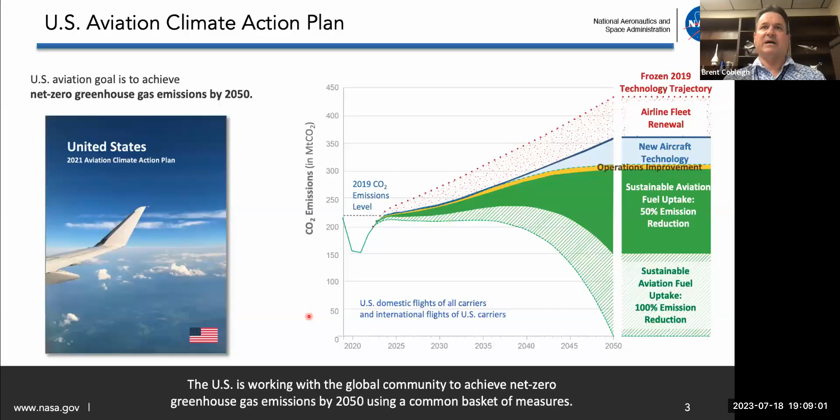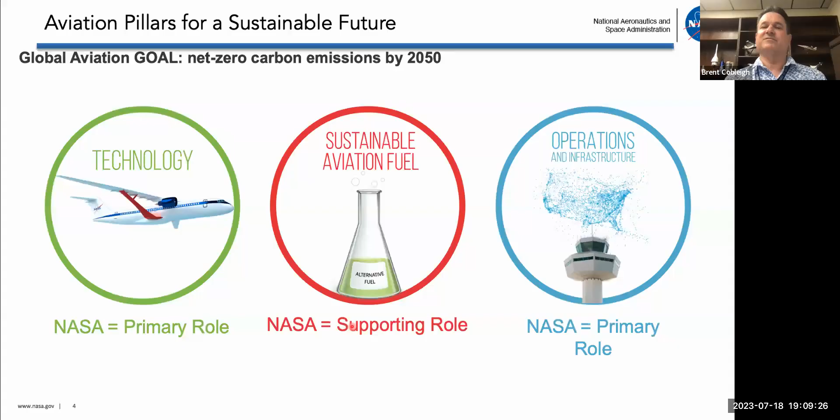So NASA's working both on the technology side as a primary area, and on the operation side, which had a little wedge there. The alternative fuel side is really mostly driven by other government agencies and, of course, industry. The Department of Energy, Commerce, and Agriculture all have roles here. We have a supporting role helping them with things like measuring exhausts and seeing how these alternative fuels—what's coming out of the exhaust, things like that. But our primary role is over here.

We've created this kind of pseudo-organization called the Sustainable Flight National Partnership. It's really a loose collection of all the things we're doing that fall into the commercial aviation sustainability window. It's a collection of projects—there's a lead for this with some system analysis people, but in general, this is kind of a loose collection of projects that are tied together, trying to bring a lot of different options to bear on the aviation world.

And so they involve some things, and if we have any time at the end, we could potentially talk about some of these other ones. But there's a lot of work focused on gas turbine engines, making the core smaller, being able to pull more power off them to run electric motors and improve efficiency. There's some electric airplane propulsion activities, both in the design field and some flight projects in this electrified powertrain flight demo. There are actually two flight demos in progress right now, working towards flight.

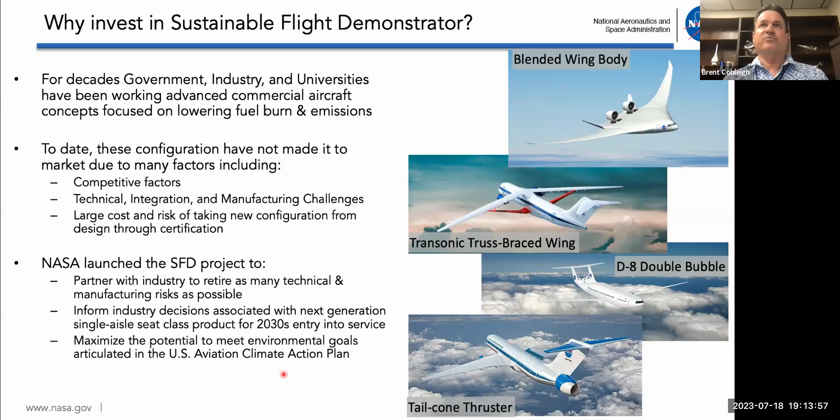When whoever launches the first sort of more efficient airplane, the others are going to have to keep up with them. And then to maximize the potential, we're going to meet the U.S. Aviation Climate Action Plan goals. So that's sort of the driver behind SFD and why we launched it.

I won't spend too much time on how we got and selected the truss-braced wing. It was an open competition. There were half a dozen or so proposers that looked at a lot of different things. We were looking at something that could make it to market by 2030, so we weren't looking at the most advanced potential technology that's out there. Our focus was, hey, we need to get something out there.

We need to improve what is there and continue to work the long range on hydrogen configurations and other potential configurations for commercial application, but we need to get something in there in the next generation. Every generation lasts for several decades, right? You've got to recoup your costs, and so there's not going to be an airplane released in 2030 and another one in 2035. It's going to be a long time later. So we want to try to influence that as best we can.

So these are the criteria that we came up with for the proposal evaluations. So we weren't just looking at the demonstrator.

So the demonstrator was one piece, and that's normally where NASA would be focused. But we said, no, we want to know what your vision is for your future product. We want to know how you're going to get there. So we're less concerned right now on the demonstrator. Let's focus on what's your vision?

What does this airplane do? How efficient is it? What kind of impact is it going to make? How is it going to hit the market? Is it compatible with the aviation system? What's your plan to commercialize?

So that was the first set of things we evaluated in the proposals that they wrote. And then, how is that demonstrator aircraft going to help you get there? So we don't just want you to go play with technologies. We want you to tell us the technology gaps you have, and then put as many of those on the demonstrator as you can. So what are those technology development plans?

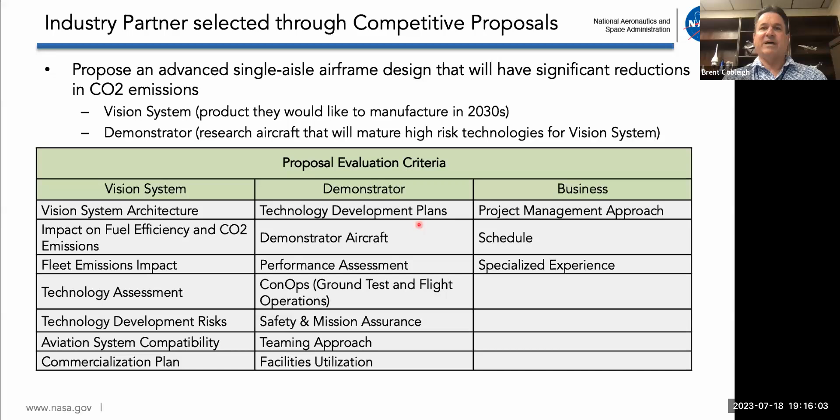So those were the evaluation criteria that we used. In the end, Boeing was selected for the truss-braced wing. NASA is providing $425 million in direct payments, and Boeing is putting in over $700 million. That's the estimate now. So we were asking for the proposers to put in 50% if they were able, or more, and Boeing truly stepped up here.

The 425, by the way, was the limit that we had. We said that they could propose, so maybe they would have asked for more if they could have. And in addition to the 425, NASA is going to be moderately heavily involved in helping with this project, and I'm going to go into some of those in a minute here. But in terms of technical labor, like engineering support, analyses, and also some of our facilities for some of the testing that we're going to do.

One of the most unique things about this approach that we're using is that we're using what's called a Funded Space Act agreement. It's a very unusual type of acquisition. It's not a contract, it's a legal agreement. We've never really used one in aeronautics before. The space side has used them. And it's really where you're trying to encourage something in industry that is helping either industry or helping the public or some other person. And NASA doesn't have a significant need for it.

And the intention is you're trying to create a product or something that really helps things other than NASA. In other words, we don't need this airplane to do our work long term, but we know it will have a benefit for the nation, for the public. And so this Funded Space Act basically allows us to cost share like this.

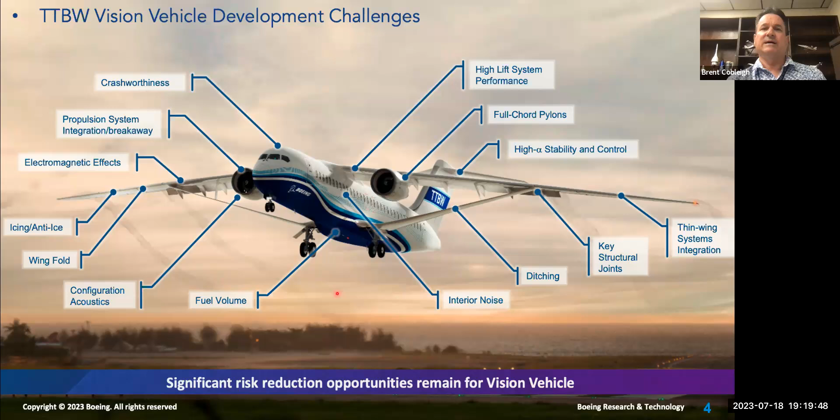These are some of the development challenges that exist. So you have this long aspect ratio, high aspect ratio wing, which means your chord is much shorter, which means your wing is much thinner. So it's a very thin wing supported by a truss. So you have many, many structural challenges in trying to design that, to optimize it, to get the best performance you can get. So then how do you integrate a high lift system into that?

You've got an engine now that needs to be attached to a wing that has a very short wing chord compared to what you would normally see. It's basically using almost the whole chord as a structural attachment. You have some high alpha stability and control challenges with the T-tail, as we've seen in the past. Just getting everything into that thin wing is a challenge. So you've got actuators, fuel, you've got the structure itself. In our case, we've got to also add instrumentation. So just getting all of that fit into the wing is a huge challenge.

And then you've got some really unique structural joints where the truss meets the wing, where the truss meets the body and interfaces in an area that typically would be near the landing gear. You've also got, how do you design this thing for safety in terms of a ditching or some other crash loads, things like that. Also damage, in my opinion, from ground operations, this truss. You've got interior noise challenges, because now you've got engines that are not on a typical single aisle low wing airplane. You've got the propulsion system closer to the fuselage.

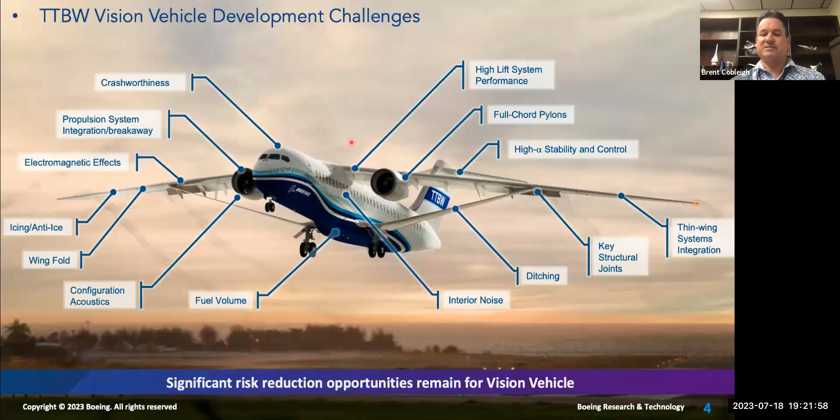And then, how do you fit icing, de-icing systems in it? And then you've got EMI issues with having everything crammed into a small space inside the wing. And the rest of it's kind of crashworthiness. So these are just a subset of the things that you have to worry about and consider and reduce risk on. So over the years, like I said, from 2008, we've been working in partnerships.

In some of the early phases, we were really looking at low TRL, just looking at various aspects of this configuration, trying to solve some of the obvious problems. How do you design the structure? How do you get the benefits? How do you deal with channel flow through this sharp edge here? You might get local supersonic flow, get a lot of drag. So you've got to solve a lot of challenges there. And that was done during the early years.

And through a number of wind tunnel tests, lots of CFD, a lot of other analyses that I don't have the data to show you guys, as we moved up, there was a strong desire to push the airplane from this kind of Mach 0.745 up to where single aisles are flying today. There are a lot of marketable reasons and air traffic reasons for doing that. And that was always a challenge. How do you get this configuration with these channel flows and so forth up to higher speed? A lot of work was done there.

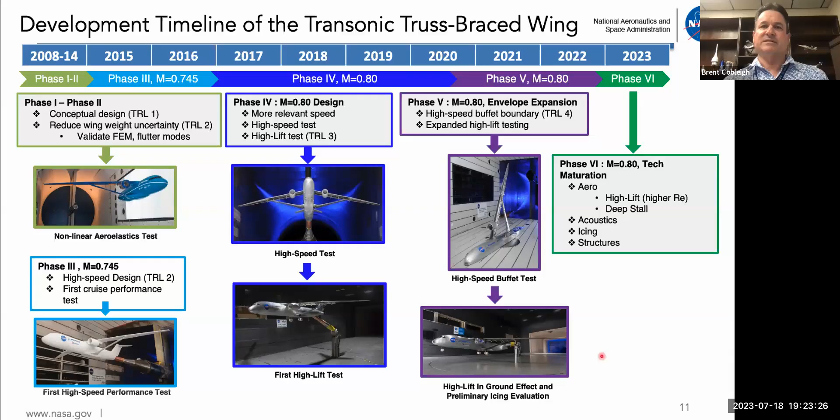It was very successful. So the configuration baseline is right about Mach 0.8, or 0.79, right in there. So a lot of work was done there. And then they were looking at off-nominal things like buffet, high lift, acoustics, icing, structures, a little bit more of that in some subsequent slides. But here's some high lift, ground effect testing and some icing testing that was done as well over the years.

So there's a lot of different ways to analyze a truss-braced wing. You typically hear people for a moderately optimized configuration saying that the benefit for sort of a long range of the airplane is, I don't know what the low end is, but you hear like 10 or 11% at the high end. So this is NASA work here, working with Boeing. I think for this configuration, which is in our current configuration, they had it about 9% or a little less for shorter missions.

And there's a lot of other things obviously you can do. So this is for a high aspect ratio wing that's 19.5 relative to like 13 today. So very significant wingspan compared to the airplanes that are out there today. And then this project, I don't have all the data, looked at a lot of, what if you make the wing sort of natural or hybrid laminar flow, adding riblets, what kind of advanced structures can you do to get the weight down? How do you design these joints for lightweight and strength as well? What kind of advanced propulsion systems can you integrate? And then how do you deal with the air traffic management with this configuration?

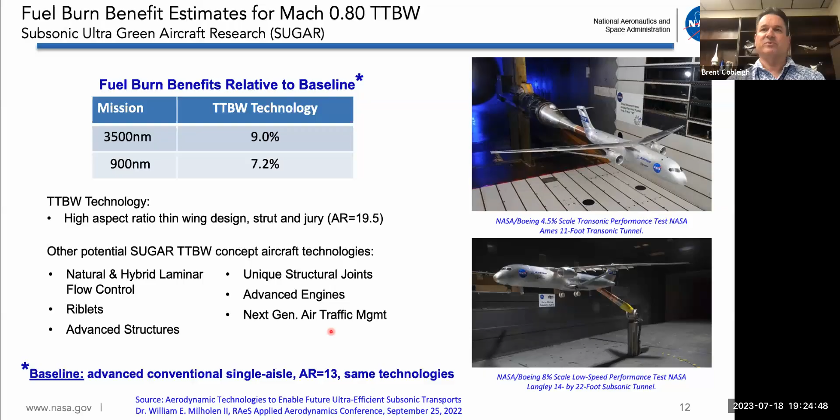So there's a little bit more later on some of these topics, but the aerodynamics is one piece, and then in a minute I'll talk a little bit about propulsion as well, how that might integrate. So I think some of this I already mentioned. Here's some of the things that there was a lot of interest in from NASA and from Boeing, looking at stall, buffet, icing, high lift. Since all of the performance and design challenges were solved, then you kind of got to look at a lot of these off-nominal situations.

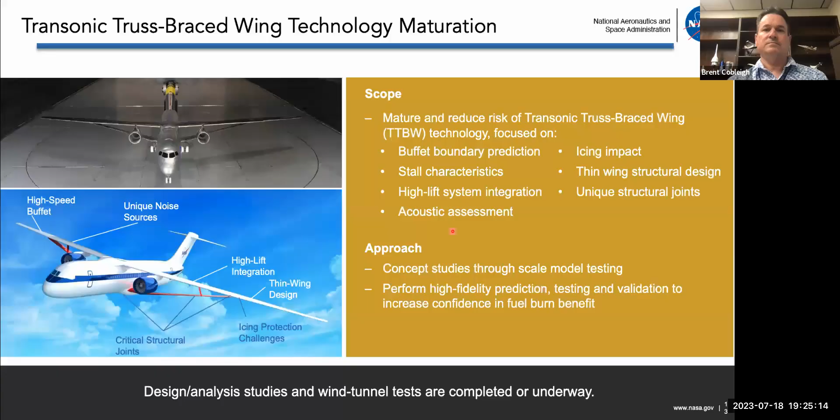Here's a couple other things that were done. So we're talking about high-speed buffet testing, really looking at where do you see that. You can see these half models that were tested in the Ames 11-foot, and that's really to get the size of the vehicle up and get the Reynolds number up in the wind tunnel. One of the challenges with having something with this high aspect ratio is the wings are so long; to avoid wall effects in the wind tunnel, you end up having to make the model smaller, which means Reynolds numbers are smaller. So one way to gain some of that back is to do some of your testing with a half model like this.

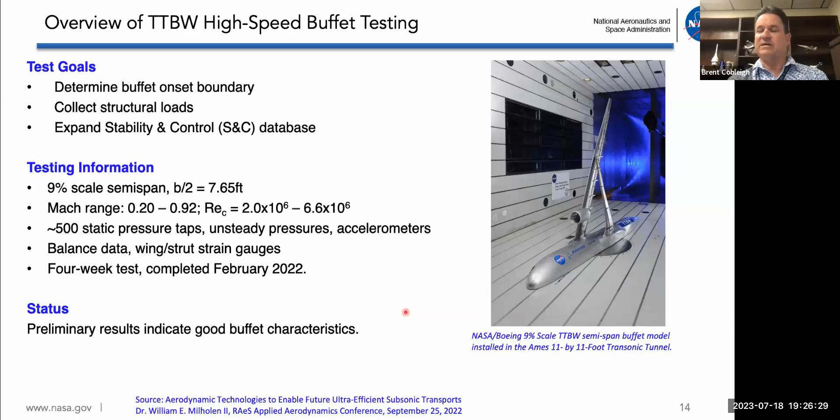And we've got some coming up with our projects. The configuration that's being developed for Sustainable Flight Demonstrator is going to have several wind tunnel tests in the same Ames 11-foot, including a full aircraft model and then a half model, just like this one is. So they looked a lot at stability and control. You can see a lot of the data on how they ran the tests back in 2022. So the bottom line is there was a lot of concern about buffet, but it turned out that the characteristics were pretty benign. They weren't concerning, at least for the data that they've analyzed so far.

And then on the low speed side, how do you integrate a high lift system on something that has such high aspect ratio? You've got a very long leading edge and trailing edge. So integrating all of the control systems into those is quite challenging, especially given that it's a very thin wing. So they looked at a couple of wind tunnel tests looking at the performance of various high lift systems. Also looked at ground effects tests. I think this is the 14 by 22 wind tunnel at Langley, where they typically do those.

And then they looked at some preliminary ice shapes that came out of some CFD results. And you can see over 500 static pressure taps on the model, so it was a pretty detailed model. And they did see that the high lift system was meeting performance goals, and the ground effect trends were as expected. And they've got some data on what the icing effects were, at least for some of the shapes. We do expect that they will be doing some additional icing tests in the future on this configuration if it moves forward.

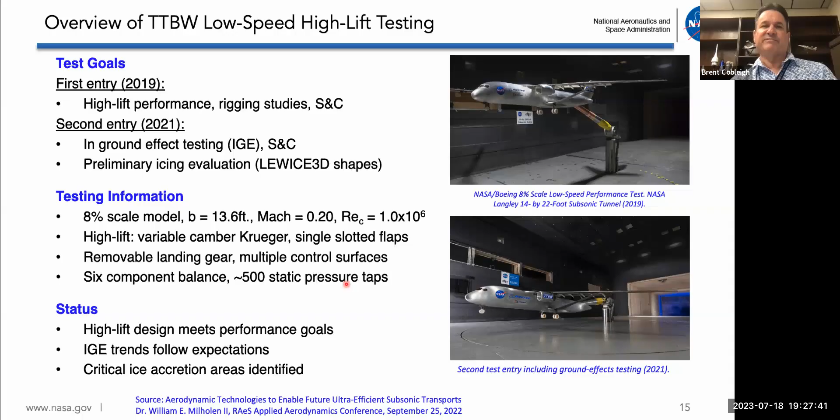So I do want to flip back now a little bit to the X-66. So this is our project coming back to today. So I'm going to give you a little bit more detail now. I just wanted to sort of stop there and back up and give you a little history of how we got to where we are. This proposal that Boeing put together wasn't necessarily out of thin air. There was a lot of really good work that went into it beforehand. So they brought in a pretty strong proposal.

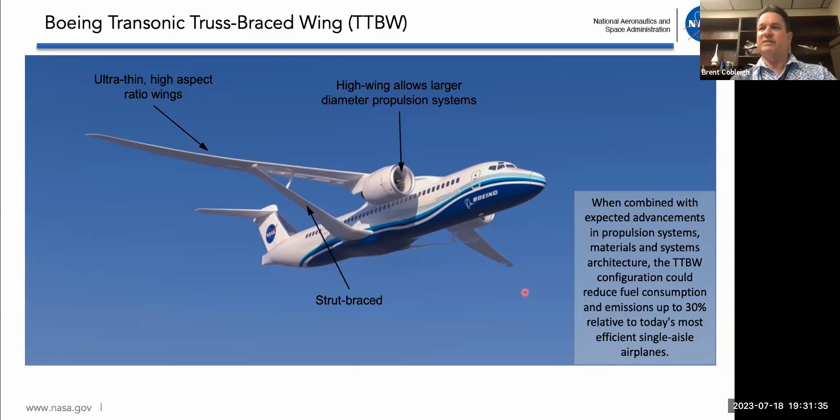And so early on, Boeing has targeted a number of key learnings. There's a lot more detail to this that I can't show, but this gives you a flavor of some of the things they really want to learn out of this demonstrator, in addition to just the overall design structure. It's the thin wing design and integration, high lift systems, like I mentioned. How do you integrate a fuel system into this thin wing and other places? How do you deal with the aeroelasticity of this very long structure? It ends up being fairly stiff in here, but as the wingtip goes out in a very thin wing, you're going to have some flexibility there, obviously.

You want to validate some of our design tools in every area, aeroelastic, structures and so forth. Obviously, a lot of performance measurements we want to take. We want to do a lot of long runs over, say, the ocean, so we can get some nice, clean data to measure the overall performance and see if it matched predictions. Similarly, some performance for stability and control and the typical flight test things. I mentioned certification, crashworthiness. How do you design and deal with that? That's not necessarily a flight test goal, but it is certainly part of the design effort that they will learn lessons from.

For the propulsion system, they obviously want to go to sustainable aviation fuel compatibility. We probably will fly at least some of the flights with sustainable aviation fuel, but there are a few challenges there with seals and different things depending on how the fuels develop. So they want to make sure it's compatible.

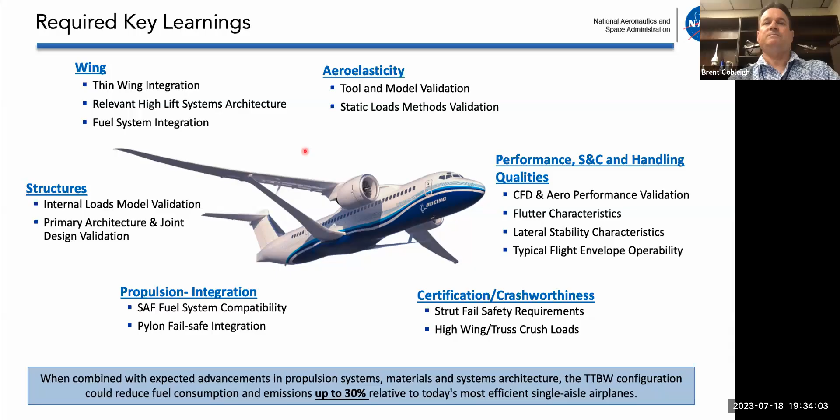So let's talk a little bit about how we're going to build the demonstrator. I mentioned that they're starting with an MD-90. They've actually acquired two airplanes from Delta Airlines that were recently overhauled before they were retired. From my understanding, there are no MD-90s flying left in the world, and so they've acquired two airplanes.

They've acquired a ridiculous amount of spares—like 38 truckloads of spares from Delta, because Delta didn't need their spare parts anymore. And what's nice about this—there was a whole trade study around what airplanes we should modify or build from scratch. Many airplanes were looked at, and there are a lot of reasons why this makes sense.

Some of it I'll show you here, but part of it is: Boeing bought McDonnell Douglas, so they own all the IP rights. They have all the design information. They have a lot of employees that helped build this airplane, including several people on our project, including the chief engineer, for example. So there's a lot of benefit. It also already has the T-tail.

So the intent is: what do we not have to do on this project? We only really care about the truss-braced wing. So if we don't have to change the tail or the cockpit, let's not. That's the intent. So how's it going to change?

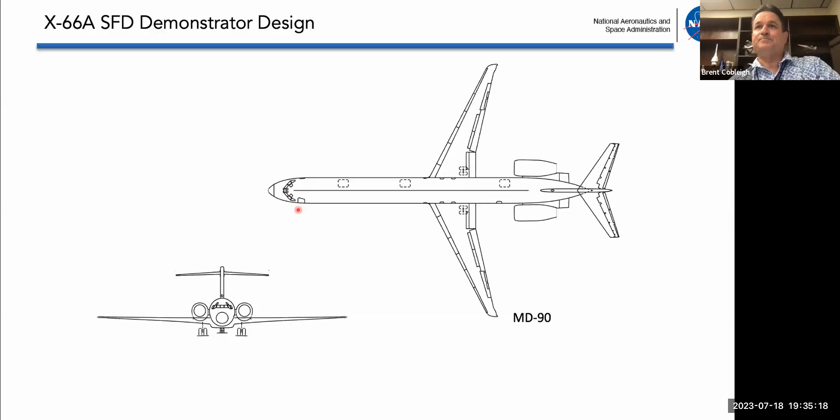Step one is we've got to get rid of the wings, and the engines are no longer going to be on the fuselage—they're going to be under the wings. So those have to go away. And it turns out, to get the configuration they're really looking for, you need to shorten this thing too. The MD-90 is an extremely stretched airplane, so they're going to take 19 frames out.

This airplane, being an older design, makes that actually less difficult to do than you might expect. I've seen it's really drilling out lots of rivets and taking things apart and putting them back together. It's of course extremely challenging and precise work, but nevertheless, they don't have to take a saw out and cut the airplane open—there are ways to do this.

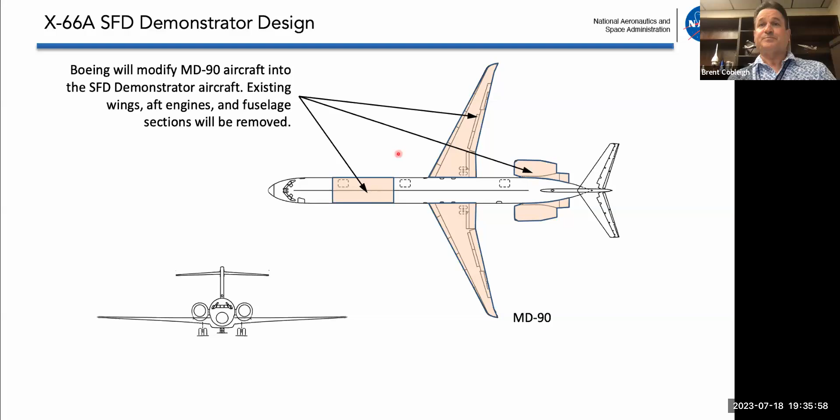So that's going to go away, and then this is what the ultimate airplane is going to look like—it's going to be replaced. You can see the engines aren't there anymore; they're up on the wing now. We have a much higher... I mean, for the same fuselage diameter, you're ending up with extremely long wings relative to that.

And this picture really shows off where the truss comes in, right? The truss is kind of perpendicular to the fuselage, comes into the area where the landing gear were, and there's some offset here, which you can kind of figure out on your own how that helps aerodynamically.

So that's basically, I mean, obviously I'm super simplifying things, but nevertheless, that's how we're going to transform this MD-90 into the X-66. The engines will be a modern turbofan engine. We're not developing a new propulsion system, but we'll be able to have something that's comparable to the state of the art.

And then, of course, you can always do trade studies beyond that to look at other propulsion options. I did mention earlier that Boeing will retain ownership of this airplane. So at the conclusion of our flight test, which is intended to be about a year, and we're targeting like 2028, 2029, they can use it for other things. Obviously, they can integrate other technologies, use it as a demonstrator for other things.

We will be doing a lot of instrumentation on this. This is all going to be built here in Palmdale at Boeing's facility, which is only about 30 or 40 miles from Edwards Air Force Base, where I work at NASA Armstrong. So once the airplane is built, they will fly it. On the first flight, the intention is to bring it here to NASA Armstrong and then do all the flight tests from here, which provides them lots of restricted airspace and access to the coastal areas where there's nice clean airflow for performance testing.

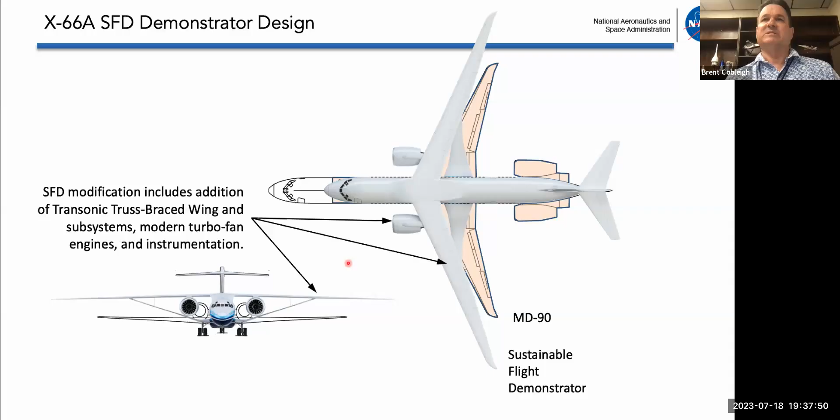So what is NASA doing here? I've been talking mostly about what Boeing's doing, but NASA does have some significant roles here. We are going to help them with wind tunnel testing, which I did talk about. We will have one of the simulations that will be doing all kinds of work, some of it preparing for flight, emergency procedures, training pilots. But my guess is they'll be doing design analysis work and other things as well.

Structural testing, we're going to test the actual truss in our loads lab, and we will send teams over to help Boeing with the structural test over the entire wing over in the facility in Palmdale, which is 40 minutes away or so driving. So we'll be helping with that. We're going to do all the flight tests here, so control rooms, hangar, radars, data management, all of that, chase aircraft. That'll all be here at Armstrong. And then we have acoustic arrays that we'll bring out for some of the flight tests.

And then another big piece of that is we're actually going to have engineers working, or we already do have engineers working on their integrated product team. So this is where we're bringing in structure experts or discipline experts to help them. And we might have some unique knowledge in some areas, and sometimes it'll just be being another person to help on the team, right? But we'll be outnumbered by 5 or more to 1. But I think it's valuable that we can bring some of our lessons learned to help with the overall activity. So it is a joint partnership, but led by the partner, as I said.

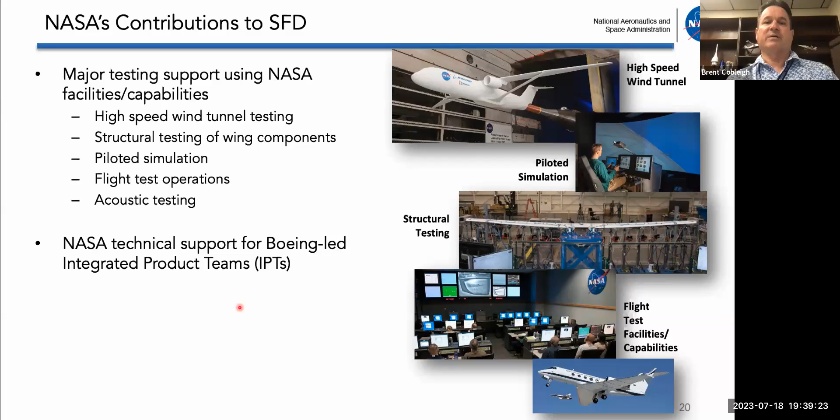The conceptual design review, which is at a pretty high level, the requirements to get through it are pretty high. They're sort of at the commercial level of a conceptual design review. That's going to be out in September, and then the requirements review out in December. We slipped it a little bit to raise the bar on what we wanted to accomplish in that review, so that's why they're out there now.

The MD-90 is actually going to be flying very soon here, like next month. It's in a storage facility. They've gotten it through all the maintenance, and they're going to be moving it down here to Palmdale, likely next month. So that'll be actually ahead of schedule.

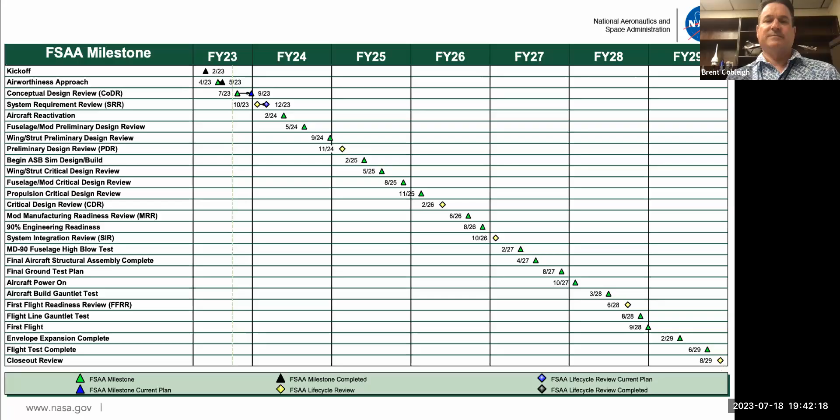Okay. That was terrific, thank you. I like to think I have a good handle on different aspects of design, but there were so many things I hadn't even considered that you covered here. Two questions, well, several actually.

One is, is the total value of NASA's labor and facility contributions fixed or variable under the FSAA? It's sort of variable. The content of the testing has been fixed ahead of time, so we know what we've agreed to do. If it costs us a little bit more to do it than we expected, we will cover that. And then we've kind of scaled the amount of workforce that we've offered up. So during the life cycle, there's a dollar figure associated with how much money we can use. And if Boeing comes back and says, hey, we'd really like some help in this area and we don't need as much help in this area, we can make those adjustments. So there's not a lot of cost risk until you get to the end. If for some reason the program slips a year, we will have some risk that we'll have to support our own workforce for an extra year, but we are trying to budget for things like that.

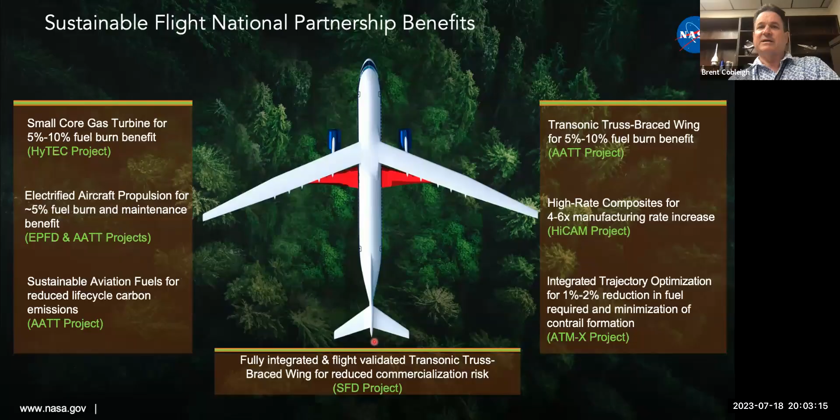Okay, it's just like 3 or 4 charts, but I mentioned these other projects in addition to the one we talked through this briefing. I'm not super familiar with these, by the way, but they all have a slide like this that gives you a little bit about what it is. There's a whole project team focused on this, and most of these are integrated with some industry partner, sometimes multiple partners. This is looking at compressing the core, making a smaller core that's more efficient, and also able to pull like 20% power extraction, to help hybridize an airplane where you have one propulsion system, and then the other propulsion system, if there is one, is powered by an electric system. It just provides some integrated benefits, just like we do with hybrid cars.

So that's one project, and it looks like they've made contract awards in 2021. Phase 1 was some stuff that they did in 2021, some studies, and then they put out the proposals, and they've received those in May. I don't remember if I've heard that they were awarded, but they probably have, or probably getting close to award on those if they haven't.

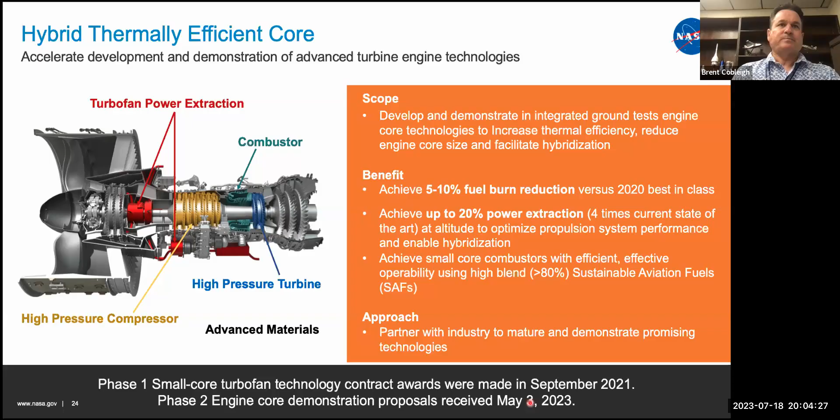And then the next one was looking at electrified aircraft. This is not the flight program I was mentioning earlier. This is just looking at all the issues mostly through ground test and advanced development. There's a lot of smaller contracts looking at the various elements within an electrified system: inverters and power conversions, and battery systems, and if needed, generators, making them more efficient, dealing with heat and heat exchanges across the system, how to get the weight down, and getting reliability up obviously is key.

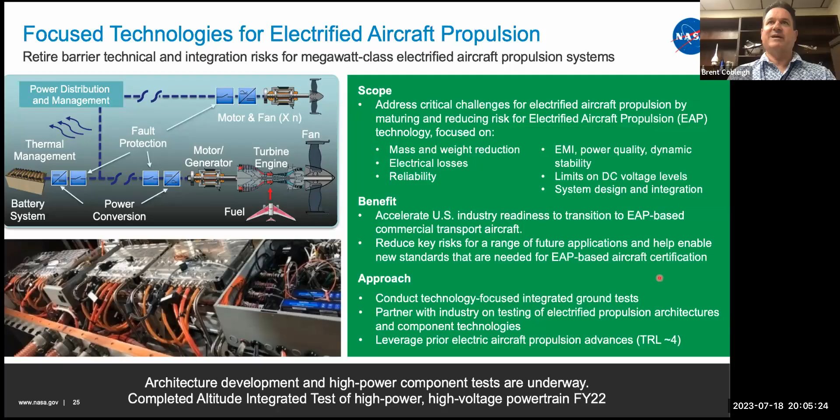So there's a number of investments here. These are sort of lots of individual investments across the whole portfolio, and I definitely don't have the details on all of those, but it's probably a lot of that can be found online. So the EAP project, you can go look up.

And then I mentioned EPFD. So magniX is the other company that's modifying one of the propulsion systems. Or maybe it's two on one side, but they, and then GE on the other ones. They're putting a single electric propulsion system and looking at the integration.

So these are all about the learning too. It's not just about, hey, do it and fly it. It's about what does it take to do it? How does it affect the other systems? How difficult are things like EMI, which is always an issue, especially when you're talking high power. How do you design things for high altitude and not get arcing? And the thing about taking things to flight is it forces you to think through all the issues.

If you just do a ground test, you can take shortcuts, and even if you don't think you are, I promise you are. Because as soon as you say we're going to fly this eventually, you're wearing your airworthiness hat all the time, going, how are we going to get this through certification? Is it really going to pass altitude? Is it really going to pass all these ground tests? Can it survive? We have a pilot's life on the line now. It changes the whole dynamic. And so having an integrated flight program really is the graduation exercise, and is really the learning tool these companies need to take it to the next step.

I have a question on that one. If you just want to flip, yeah, there you go. You say baseline unmodified flight testing of the GE Saab 340 was conducted.

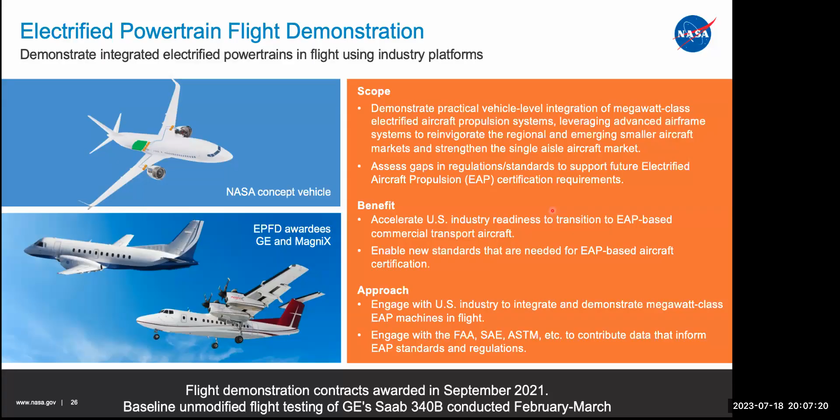Okay, I'm just curious then. Yeah, with the same kind of instrumentation system, so you have a real apples to apples comparison. If you're comparing against what the manufacturer says is the performance, you never know if that's really apples to apples. So we use our own instrumentation system, the exact same flight points, same flight, same pilots, everything. Now you've got a really apples to apples comparison, and you can take that delta really well.

And also make sure the airplane is good. Some of these airplanes came out of long storage. I think we got at least one of them for free.

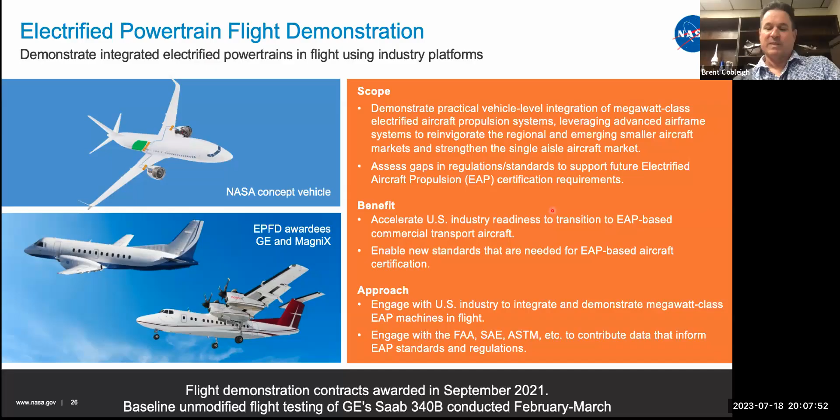Then there's this high rate composites question. How do you get the production rate up by a factor of 4 to 6 over today without cost or weight penalties? So we're exploring all kinds of advanced manufacturing techniques and different materials, thermosets, thermoplastics, and looking at how to do things out of autoclave if possible, using automated fiber placement machines, and how to do those in a way that keeps up the manufacturing rate.

Because for anybody that's been out to see the 737 line, it's impressive when you see these train cars come in from Kansas with these 737 fuselages, and they're pumping two airplanes out of the factory every day. It's incredible to watch how quickly these things get integrated, and you've got to have a high production rate to be able to handle that.

So this team's saying the state of the art right now is maybe you could develop 10 to 15 composite fuselages a month, and they're trying to get it up to 80 to 100 without having massive infrastructure increases over today, because we're doing it with metals today. I mean, the 737 is an aluminum alloy that's easier to manufacture at high rate.

So I think that was it. Just thought maybe you'd see a flavor of some of those other things. So these are really tangible, because this is near term, 2030s, putting a lot of money into some really practical, tangible activities that have high industry connection.